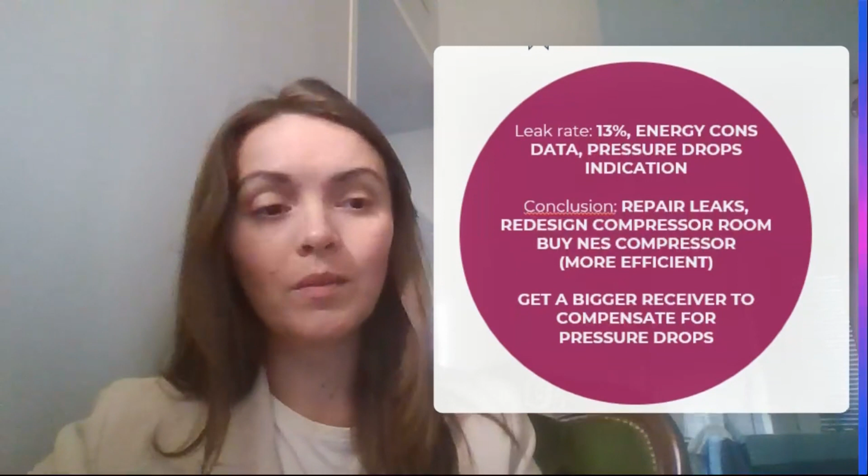Basically, one air knife consists of various nozzles. You can calculate the amount of these nozzles, and find in the catalog the diameter of the orifices for those nozzles, and create the simplified model, well, not simplified model, of the air knife.

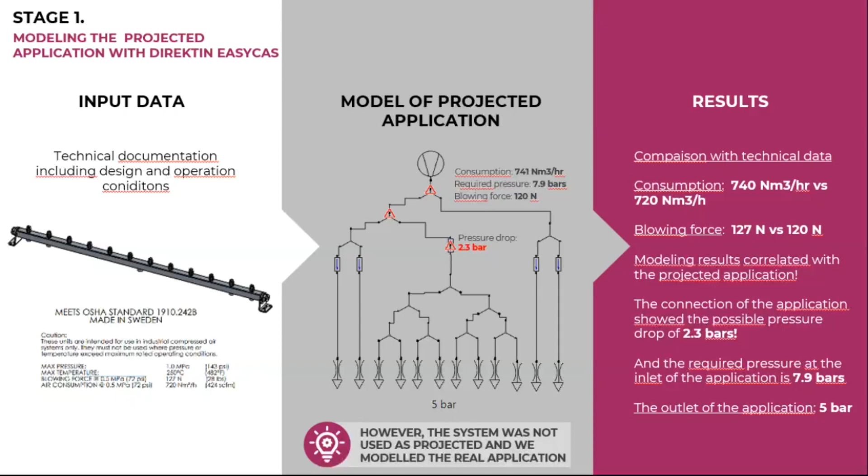Now I would like to show you how we did it in the EasyCAS software. I would like to open the model, and here you can see the calculation.

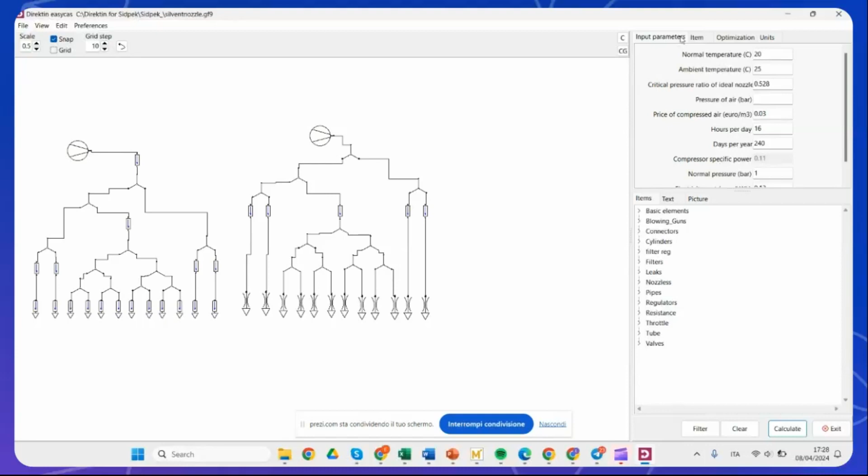Don't forget to put input parameters, pressure level at the compressor. And here you can see that nozzle, this is the air knife model, and this is the model of the open pipes.

You can easily compare it and see that if we have open pipes here, we need high pressure, about 4.5 bar. There are pressure drops also if we use the same design. And here it is the optimized already model with the real operation.

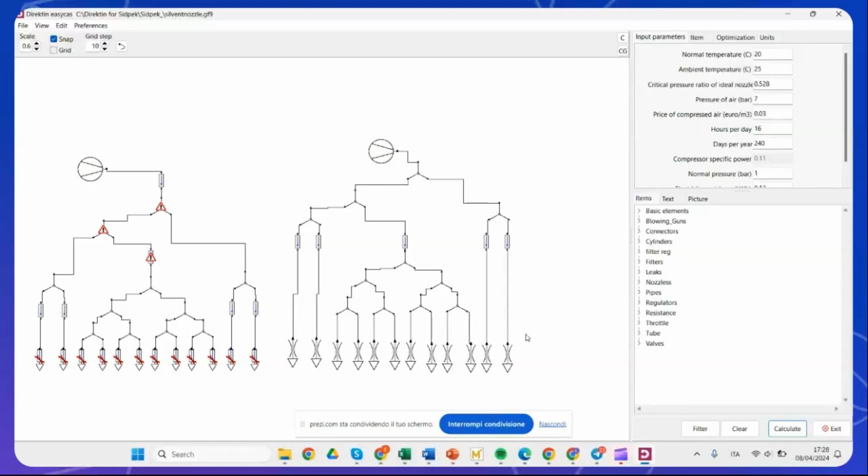The thing is that the real pressure going at the end of the orifice was about 2 bar, although the machine builders, machine operators, were expecting to have 5 bar as they projected this application. However, it was only 2 bar, and the flow rate was about 365 cubic meters per hour.

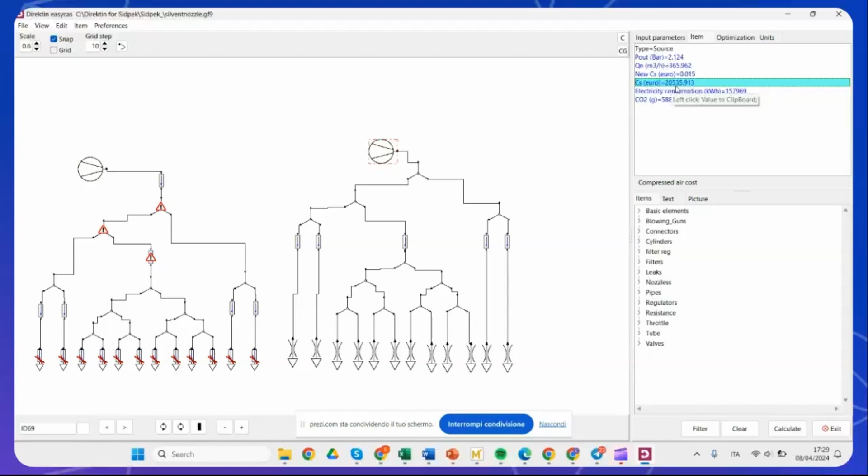You also can see the cost, operation costs. It's quite a lot, 20,000, if we see here. Sorry, it wasn't. Yeah, so exactly, but that's not it, because if we go into the detailed application, we start to think how to calculate and how to manage the full system.

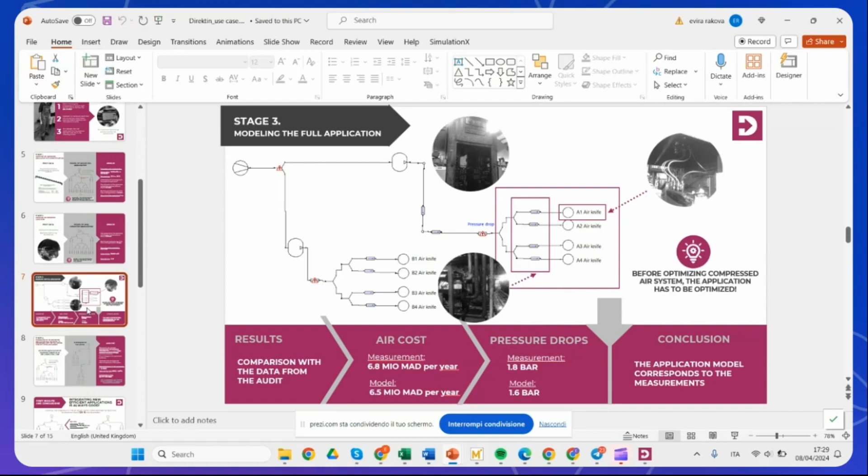So here, as I said again, what we did first was the projected application. The projected application was expected to have 5 bar at the end.

When we analyzed the diameters of the connections that were installed there, and also the tubes that were installed there, we saw that the pressure drop was supposed to be only 2.3 bar on those connections. And to operate this kind of system, we had to have the pressure level at the compressor around 8 bar, also with higher consumption.

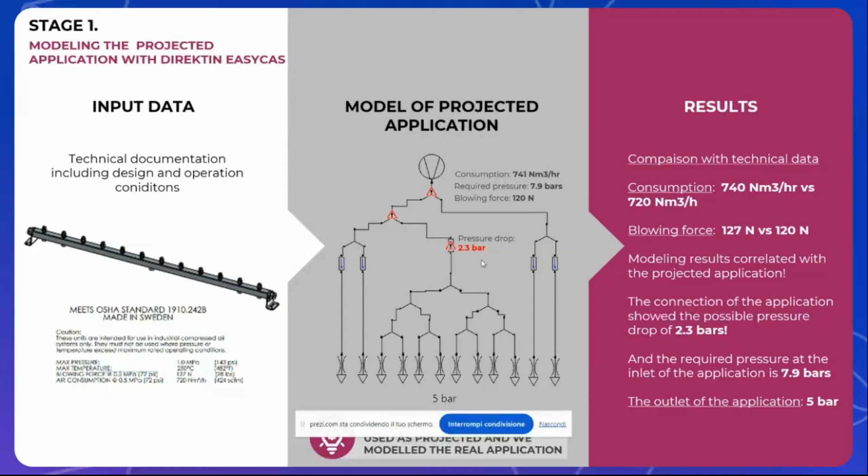However, it was not the case. The system was already delivering around 2 bar, meaning that the projected application was not able to perform, simply because the pressure drop of around 3 bar that we saw at the machine was exactly what we also modeled. Those pressure drops were caused by the wrong design or the wrong installation.

What was the real application? The real application was that here it was around 2.5 bar. The force was lower, so here we also modeled the force at about 127 Newton, while the real one was 17 Newton. The real consumption was also lower, and there were pressure drops, but they were smaller.

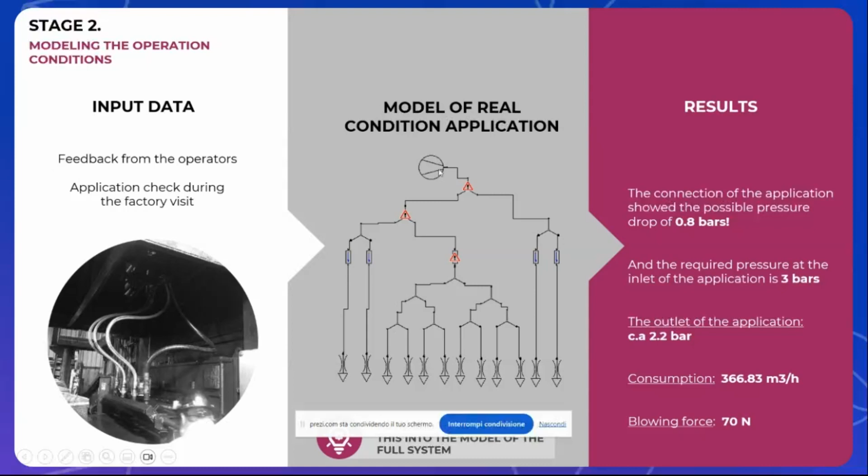After we could model, we go and create a super component. This is a detailed model of the air knife. We take the data from this compressor, or from the source model, and put it in the various plots here, because we had two machines, and each machine had four air knives.

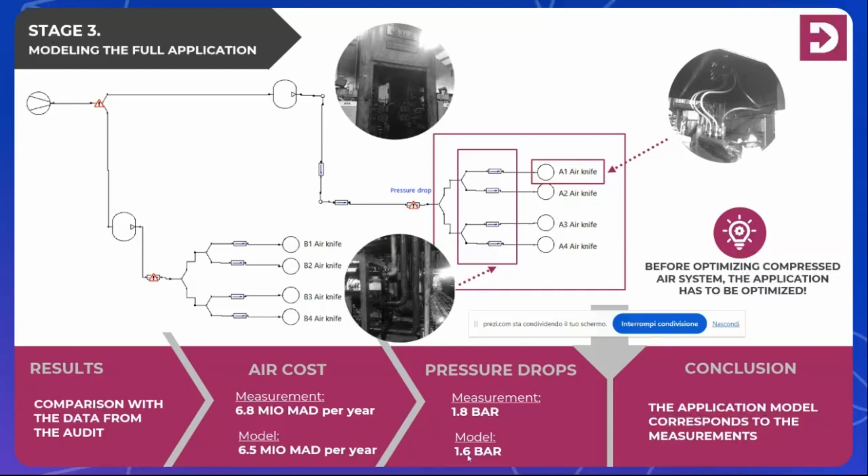What we saw in the measurements and in the model was that the consumption and the cost were more or less the same, and also that the pressure drop in the diameter of the tubes was about 1.8 bar, while the model showed 1.6 bar. So as you can see here, the problem...

...is not a compressed air room issue. The problem is that the projected application was not suitable for the system that was there before. There were very small pipes causing the pressure drops, and in general the overall design was not made to operate at 5 bar with the same application.

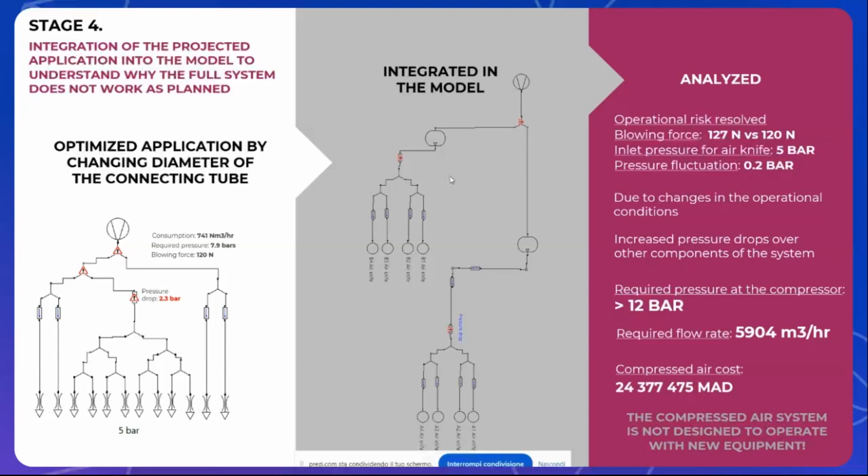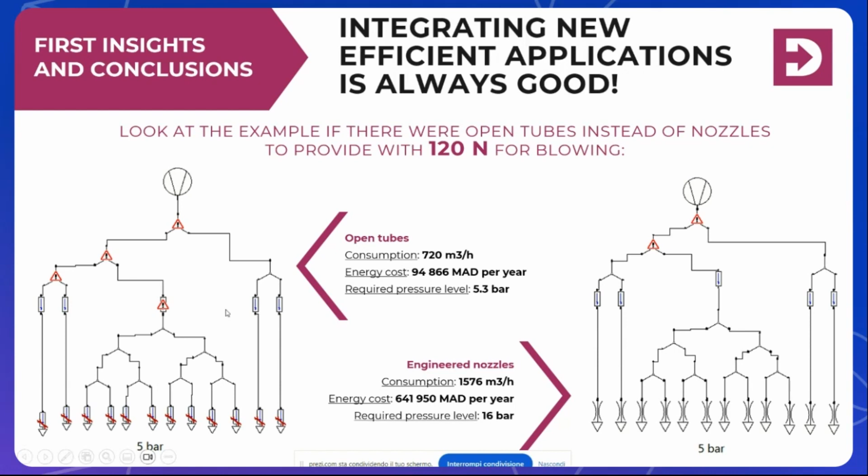We have to have a 12 bar pressure at the compressor room. However, installing the air knife is a very good idea compared to open pipes, but we always need to remember to check the full application after this.

With the program, we can also calculate various applications, the projected one, the reduced blowing force, and find some compromise. For example, in this case we checked what if we replace connectors in tubes from the air knife, and keep the required pressure level, what the required pressure level at the compressor would be, and what the air cost would be. They were actually higher than the cost we have now, because we need to work with higher pressure levels.

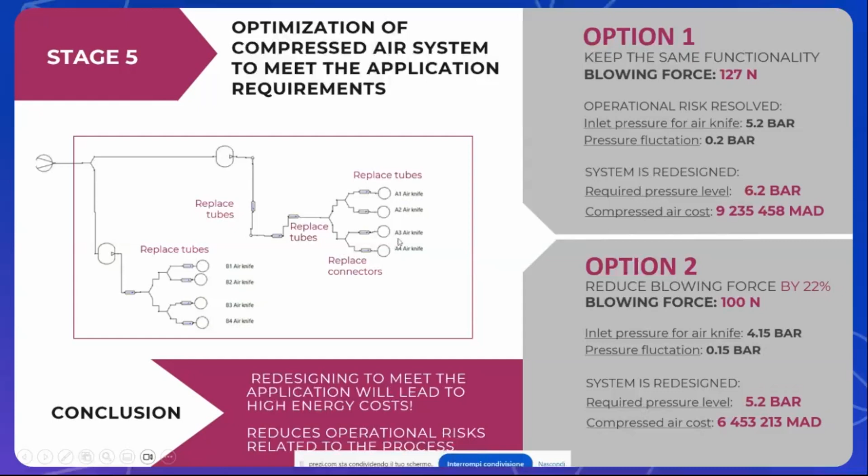But then you can also check what if you reduce the blowing force, for example by 22%, and reduce the required inlet pressure in the air knives, and how this will change things.

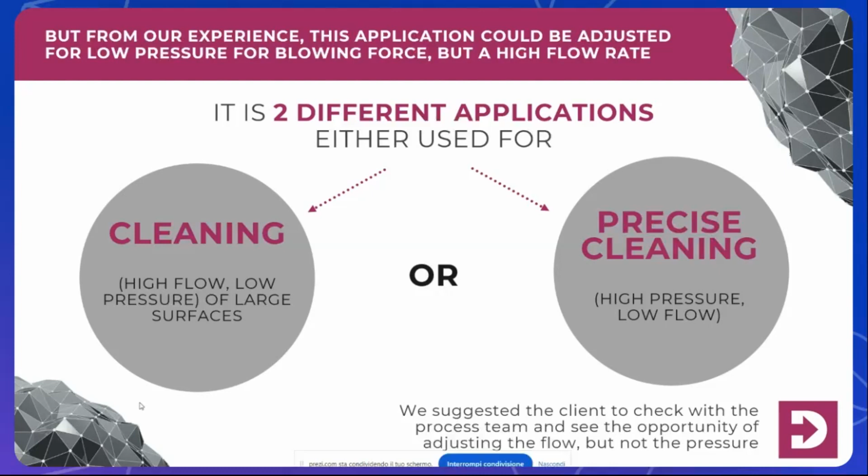Another thing I want to note is that for this kind of application, we always need to remember that either we need cleaning with high flow and low pressure, or we need very precise cleaning where we need a certain impact force, with high pressure and low flow.

If we need high flow, we can easily use option 4 here, the blower, and we don't need to use a compressed air system. We don't need to compress until 7 bar and then decompress until 2 bar to get the higher flow. Or we can always work with lower blowing force and check what the real requirements of the system actually are.

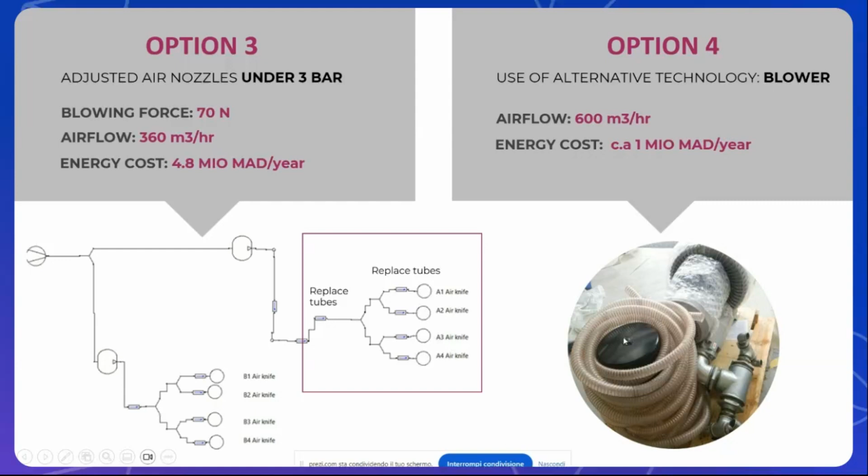Once you've calculated each application, you can have nozzles here, you can have cylinders here. You can check what pressure level is required, what flow is required, cost and other parameters.

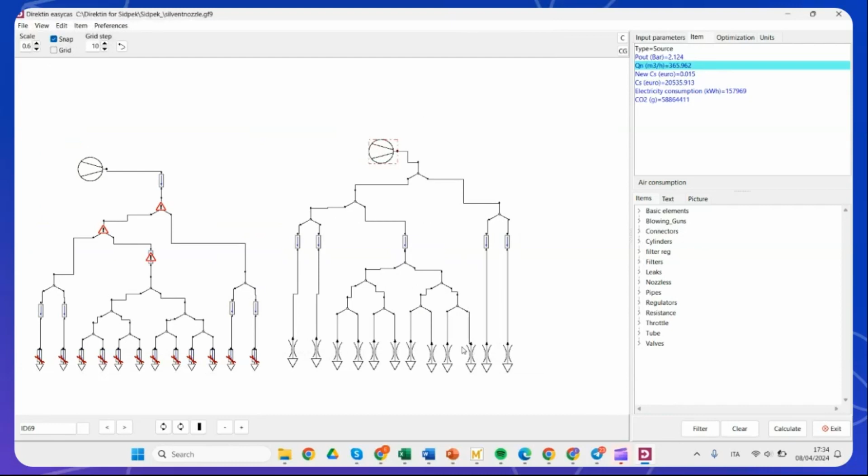After this, you can integrate it as the super component inside a bigger system. For example, here I'd like to open the model with the bigger system. And here, this air knife is my super component that I showed you before.

This is called the consumer. You can find it here, it's called the consumer. You just parameterize it with the flow rate as well as the pressure level. After you calculate, don't forget to put in the input parameters. It's very easy to input - the program will always ask you what you forgot.

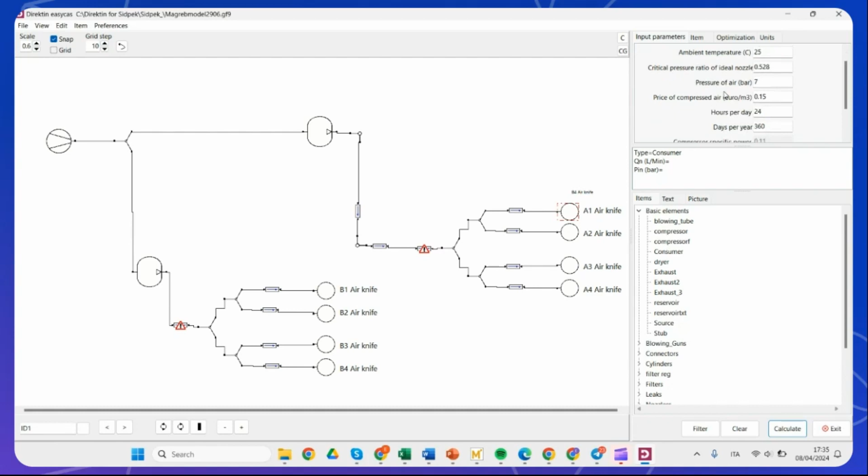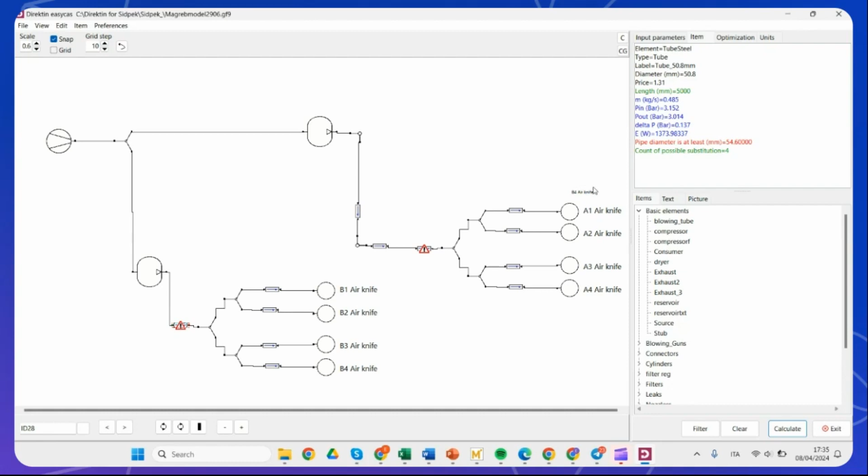After this, you can also calculate the air reservoir retention time, the volume required with a certain pressure difference. Here you see we still have a pressure drop that isn't very big, but it's still present. You can also replace it and see how the system looks now. This gives you the calculation of the required pressure level at the compressor, flow calculation, as well as CO2 impact and cost.

As you can see, the program allows you to calculate various applications as well as various scenarios, compare them, and understand from the measurement data provided by the operators where the bottleneck of the system is and how it's possible to improve it.